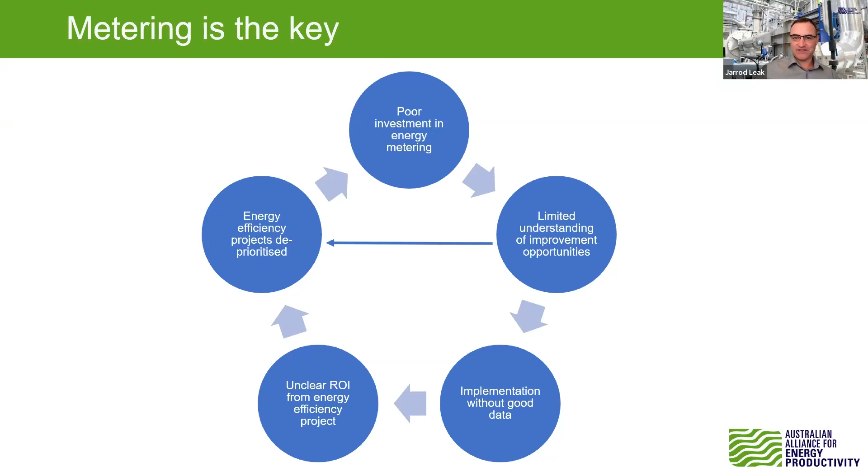So getting metering right really is the key to seeing these sort of projects go ahead. Once you've got that good data, you're sizing products and solutions correctly, and I think importantly, you're able to celebrate results and celebrate achievement and celebrate the investment there. And I think that is just so important here.

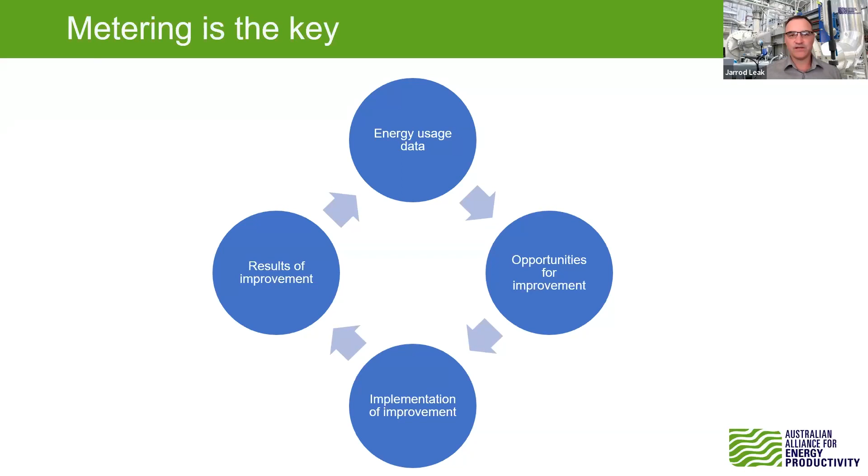And so that's why we're really encouraged by the likes of New South Wales government, and I just hear now that the Queensland government is also doing some sponsoring of metering programs to make sure that people do see the benefits of that, and really hope that kickstarts a wave of excellent metering across industry.

So to take us through a metering update and the state of play, we've got 4 great speakers for you today. Robert Hughes from the Office of Energy and Climate Change in New South Wales Government is going to kick us off and talk about funding. We've got Carlo Baghdadi from Schneider Electric to talk to us about metering. Gus from Endress+Hauser is going to take us through where some big energy users are on a process site and the metering solutions for those. And finally, Brad Parsons from Reliability is going to take us through a little bit on Internet of Things, Industry 4.0, and a little bit of how AI is now helping.

So to kick us off today, I'd like to welcome Robert Hughes. Robert has recently joined New South Wales OECC after 6 years at NABERS, where he's done plenty on the auditing programs, and plenty in the water and environmental engineering industry. So we're definitely in safe hands to take us through what the government's planning. Robert, I'll stop sharing and get you to start your presentation. Robert is also joined by Brian Yeo from OECC, who'll be here to help with any questions that may come up. But Robert, over to you to take us through this fantastic program that you guys are just about ready to launch.

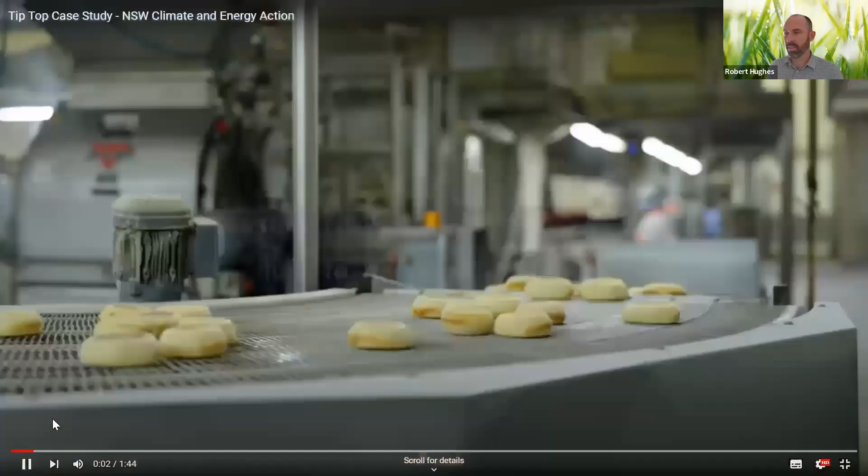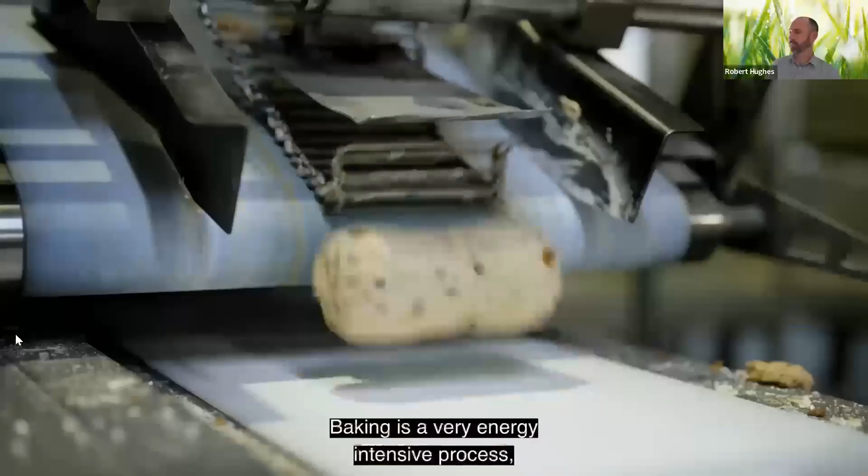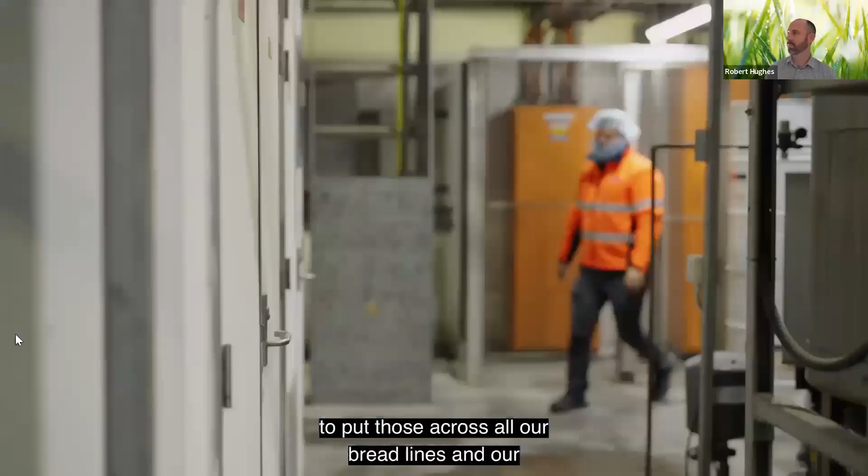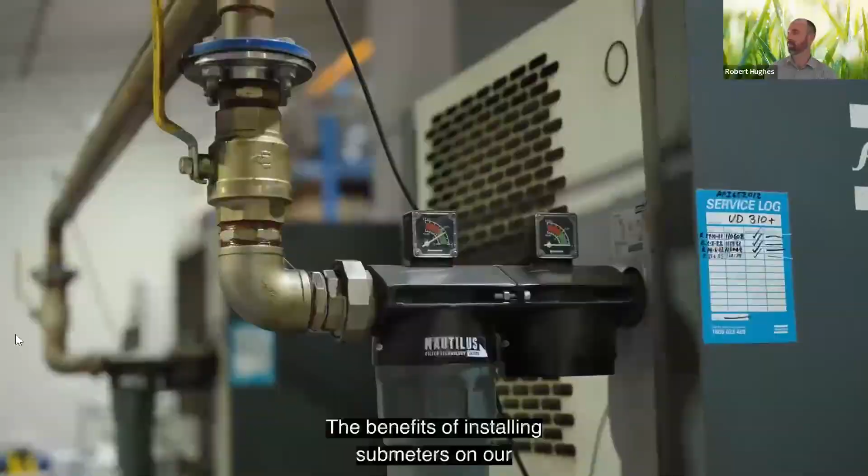Baking is a very energy intensive process, and our mixing alone takes up a very large portion of our energy costs. In 2021, we received a grant from the New South Wales Government to install electricity submeters, and we managed to put those across all our bread lines and our production facilities, which has been able to really give us much more insight into our power use and give us a breakdown of how much we're using in our factory. The benefits of installing submeters on our site was immediate. We were able to drill down into our two identical bread lines and find that they had some very slight differences in energy consumption, and we were able to go and attack those and fix those.

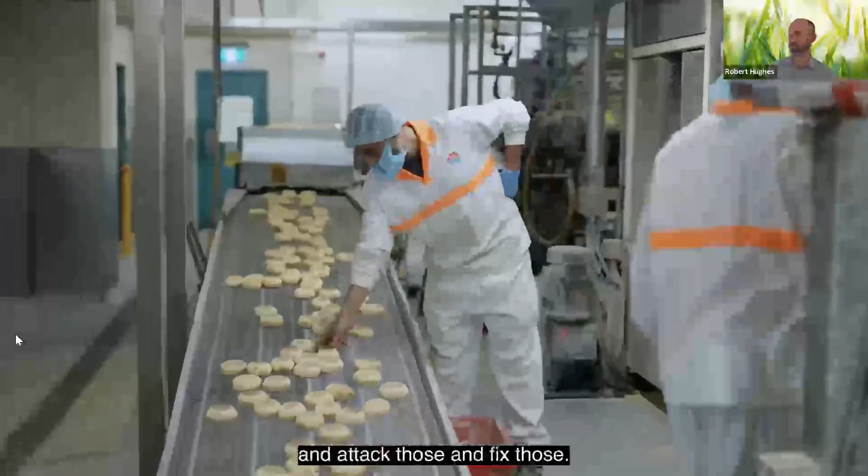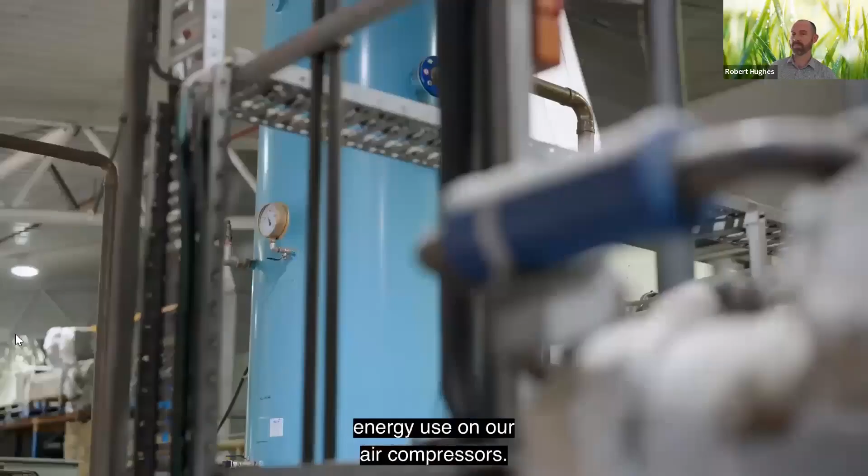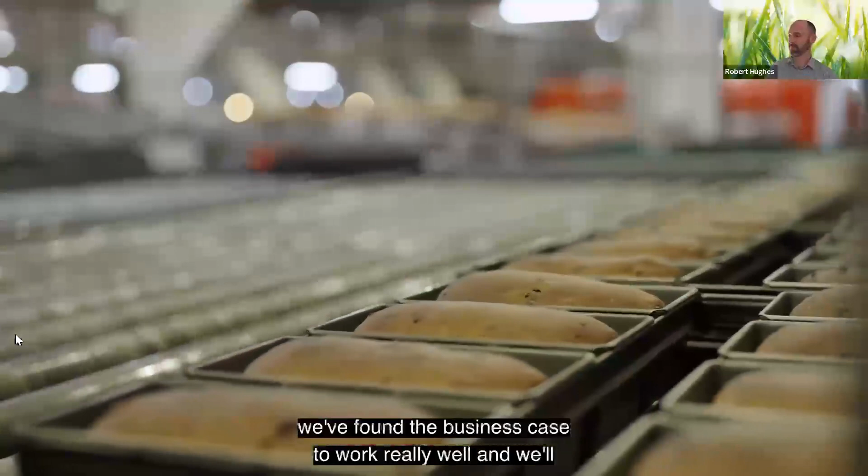Probably the biggest thing we found is our air compressors on site consumed a much larger proportion of our electricity use than we were expecting. We've installed an air optimizer on site, which has been able to knock about 8 to 10% off our energy use on our air compressors. Installing submeters on site has really helped us achieve and work towards our 2025 environmental targets, which include reducing greenhouse gases by 30%. Since we've installed the submeters on site here, we found the business case to work really well, and we'll be looking at rolling those out across our other 14 bakeries across Australia and New Zealand. Acting on environmental challenges here at Tip Top is really key to what we're doing. So anything we can do to reduce our footprint and move to sustainable energy is really great for us and for everyone.

Okay, so this case study should be available via our website shortly, and we hope for many more success stories like this through our metering package.

So the $12 million metering package that I'll discuss today is delivered by the Office of Energy and Climate Change. The package supports businesses to get the most out of energy metering and monitoring, and the package includes several initiatives, including round one of sub-metering grants, which is now closed, the metering and monitoring planning program, which is open currently, round one of metering plan implementation grants, which are expected to open this year, and an energy performance services initiative expected to open next year. So I'll focus on the specifics of the projects that are of immediate current interest, which are the metering and monitoring planning program and the metering plan implementation grants.

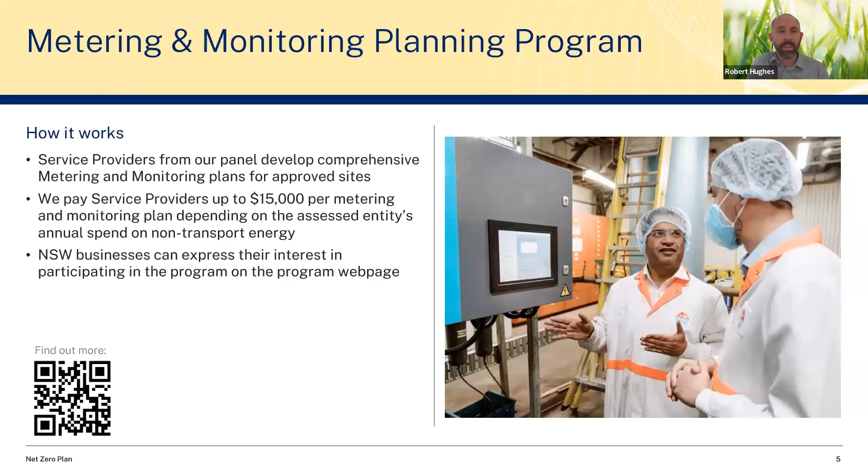Our metering and monitoring planning program is currently open, so I'd encourage you to take a look at our website. And this is how it works, essentially. Service providers from our panel will develop comprehensive metering and monitoring plans for the approved sites, and we'll pay those service providers up to $15,000 per metering and monitoring plan, depending on the assessed entity's annual spend on non-transport energy. So New South Wales businesses can currently express their interest in participating by going through the program webpage.

Some key eligibility criteria are listed here, but please make sure to go to our website for full information. Some of these criteria include there must be a business in a manufacturing sector or another industrial or commercial sector. They should have a complex energy system in terms of the number of processes, distribution systems, energy types, or end uses involved. There should be a site or facility located in New South Wales and spend more than $200,000 on energy annually per site, including all purchased fuels, aside from fuel for transport. And they should have a clear and justifiable objective for developing a metering and monitoring plan. And if the site is a commercial building, then it's the base building that is being considered for eligibility.

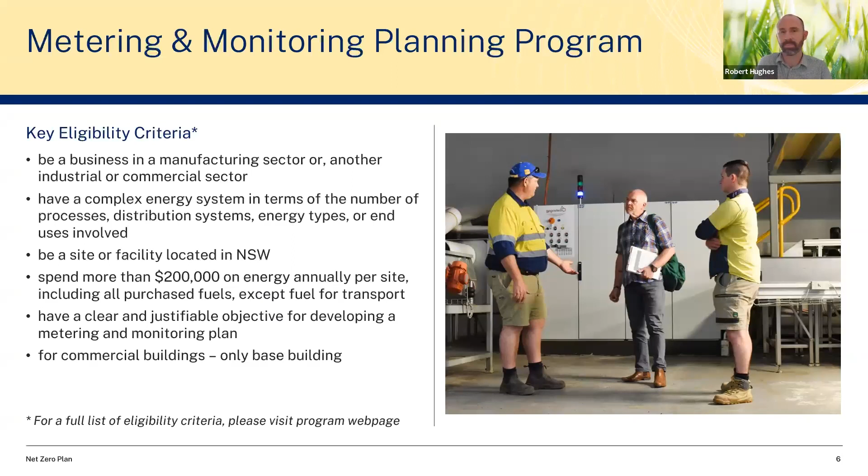So we are also expecting to launch a grants program for the implementation of metering and monitoring plans. Now, more information will be available following the launch, which is expected this year. But we can advise we may fund up to 50% of costs for eligible projects. So watch this space. The best way to keep in contact is to add your expression of interest via our website.

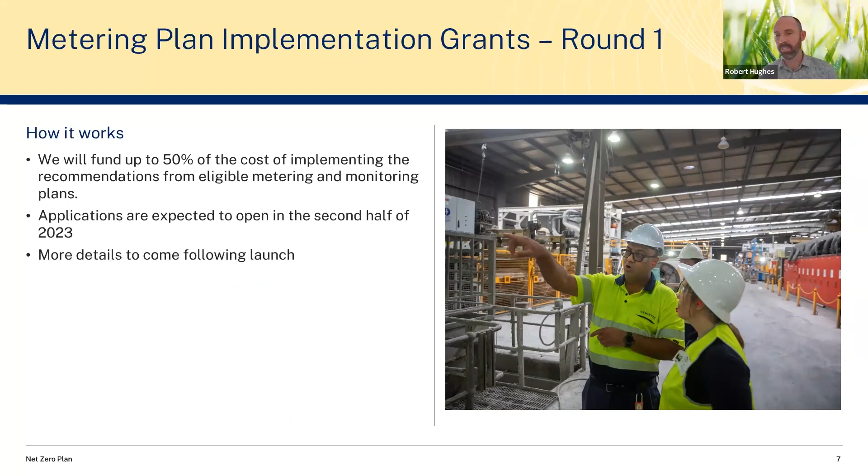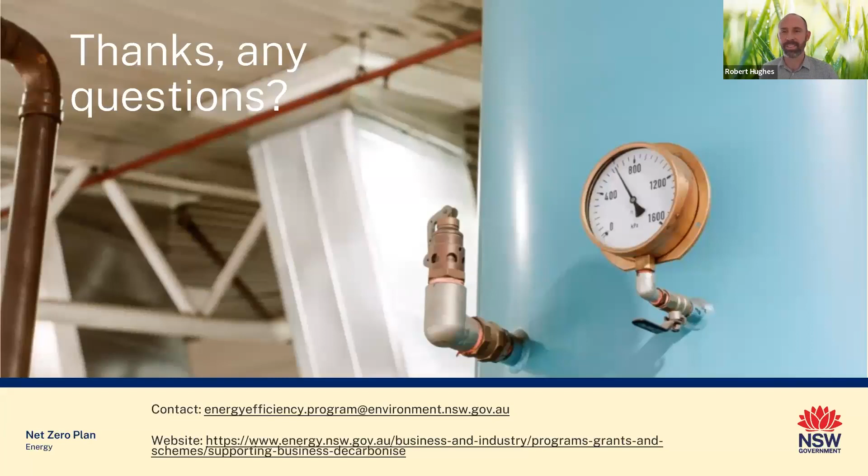And round one, when you were helping with this implementation, I recall there were $25,000 co-funding grants, if I'm not mistaken. For the implementation, when you did that last year, that was $25,000 per site, I believe. I'll jump into that question. We give, I think, up to 20,000 for that, not 25, and that one was sub-metering grants. Sub-metering. Yep. And so you're hoping to make it something similar to that then as well.

So it's metering as well as this. So this would cover instrumentation and things like that as well. Yep. But for this grants round, we are targeting larger energy users compared to the sub-metering grants. Yep. Gotcha. That's the difference. Yeah. Thank you. And that was excluding transport fuels as well. That's right. Yep, the criteria is almost similar. It's just the target audience is different.

Okay, great. Not too many Q&A coming on that one. Maybe Robert, it's just straightforward, and it's like, great, there's going to be submissions coming. But if I understand, it was $12 million. It was the 12 million. Was that covering the $15,000 for the planning and the 20,000 for the implementation? So that's for both those. Yeah, I think that that's all from the $12 million pool. Great. So hopefully you'll be helping a good few hundred sites in New South Wales. As many as we can, hopefully.

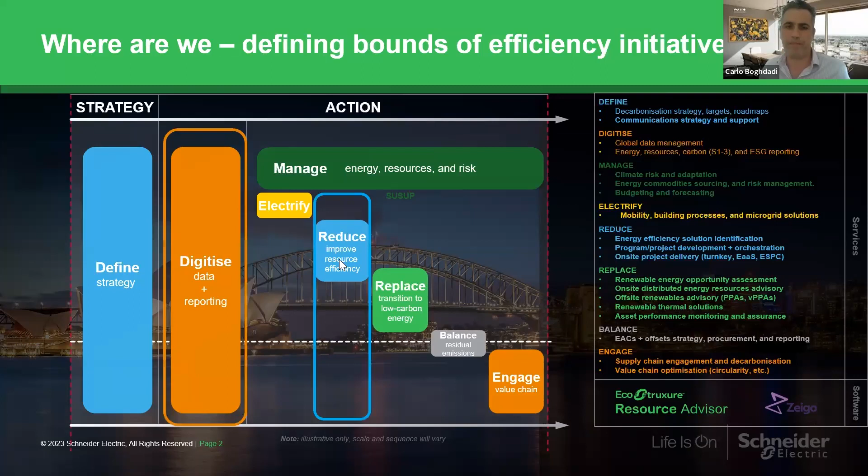An MMP is the first step towards implementing an energy management system and can help achieve many objectives, including increased energy efficiency. Energy savings can be 15% or more from an EMS, and with the cost of energy on the rise, efficiency is even more important now than ever.

MMPs can lead to optimised resource allocation because as we have accurate data on resource usage and efficiency, we can allocate resources more effectively, leading to cost savings and improved productivity.

Furthermore, metering can enable data-driven decision-making. No longer are decisions made on gut feelings. These days, we need real-time data to understand what's happening, why it's happening, and what we should do about it. Also, they provide us with a mechanism to evaluate performance, whether it's a manufacturing process or trialling a software application. Understanding how well something is performing is crucial for continuous improvement.

They can help us identify and mitigate risks by monitoring various aspects of a project or operation. We can spot potential issues before they become significant problems, saving both time and resources. They also help to ensure that we meet regulatory requirements and maintain accountability in our operations. So now that we understand why metering and monitoring plans are essential, let's delve into what they entail.

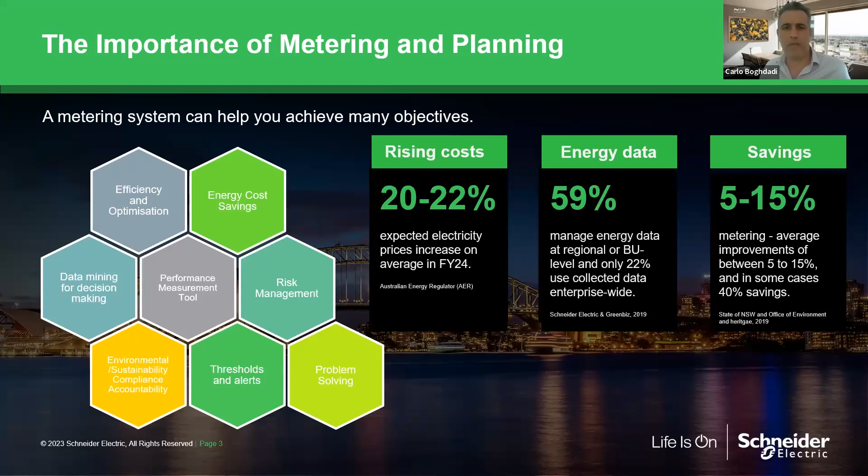An MMP report is created from on-site investigations by engineers and metering experts working in collaboration with the customer, who are often also site engineers. The report serves as an investment decision grade tool to assist companies in making decisions on an EMS, or energy management system. So in an MMP report, you would typically see the following sections.

It will start by defining clear objectives: what are you trying to achieve with your monitoring efforts, and specifically what data you need to collect and why? It will include analysis of all the energy sources, using the available data on hand to understand overall usage on an hourly, daily, monthly and yearly basis.

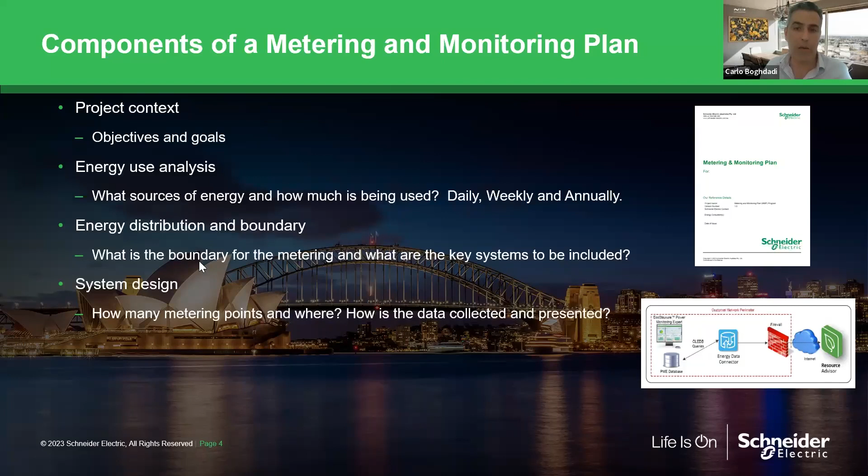Next, an energy distribution boundary, where you define what energy sources and systems services you will monitor. It will include a system design encompassing everything from how many metering points, what kind of meter, what CT, whether there are any existing meters or systems to integrate, what communication devices are required, and how data is collected, and so on.

It will include the installation costs: cost for meters, cost for installation, integration, and cost for communications and cloud services. And finally, next steps, including how to go to market, details for any recommended energy performance or bureau services, recommendations for an energy manager or energy team, and which stakeholders to involve with this project.

Now let's explore how to implement metering and monitoring plans effectively. Step one is to select your partner to assist with developing your MMP report. Companies like Schneider Electric and our EcoXperts are here to assist with this, and to assist with developing strategies, goals, and identifying potential government grants, which you've already heard about.

During step two, your partner will complete the MMP, including designing a metering solution, identifying critical metering points, deciding on appropriate data collection models, presenting the right tools and technologies for data collection, and all the analysis required for the MMP report. This also includes developing and refining a business case for the metering system.

So now you're at the implementation stage, where you will finalise the solution and develop fixed costs to procure metering, complete installation, commissioning, and integration. Post-implementation, with the metering system now installed, it would be time to initiate your active energy management plan.

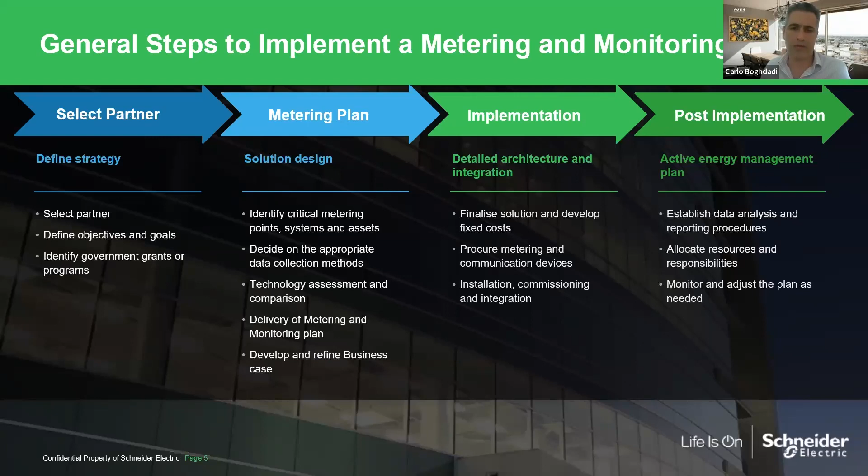Your partner needs to be abreast of the latest in technology and innovation. That's a no-brainer. Of critical importance, they need to be up to date with data security and privacy to protect sensitive information and comply with privacy regulations. Reliability is of great importance, working with a partner who stands by their products and services and will be around in the future. The ease and ability to integrate to existing systems you might have on site is also vital. Also of equal importance, customization and scalability to meet your custom needs. It is also imperative that all compliance and regulations are considered. And for the long term, maintenance and warranty is of critical importance.

Oh, sorry. Computer froze up there for a second.

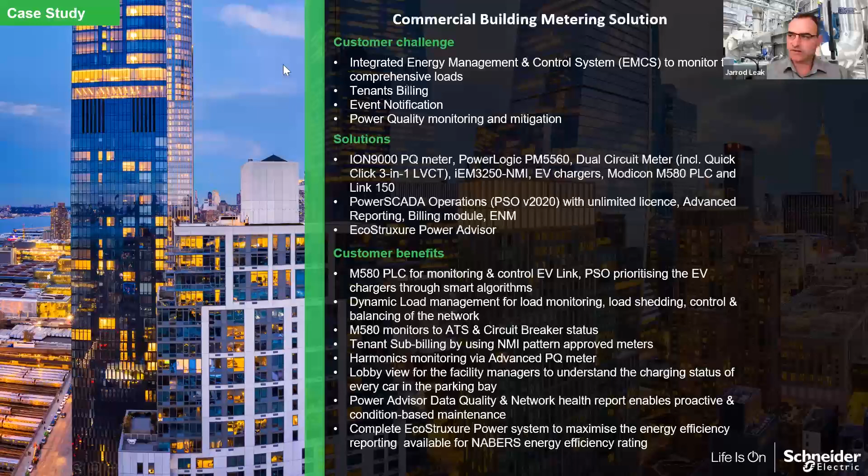Thank you. You'll see those grants coming, looking at $15,000 for that planning. I've heard of sites spending $100,000 or more on their metering planning. Is $15,000 more going to be for the smaller sites if they want it fully funded? Some will just use the $15,000 to reduce the cost of a larger study.

But is that really just going to be for smaller sites, or do you think you can get a reasonable site done for that $15,000? I think, Jarrod, it all comes down to the size of the site. $15,000 will probably cover your average commercial building or industrial site. If you're talking multiple sites, potentially across multiple states, or in this case we're talking New South Wales, or multiple locations within New South Wales for instance, you might expect to pay a little bit more.

But there is a lot of time spent on site. Sometimes the engineers can be on site for two or more days to collect all the data, to have all the discussions with the client, to understand what existing systems there are, to make sure you integrate with any existing systems, because most sites you go to will have some form of metering. They may not be making the most of it. So hopefully that answers the question.

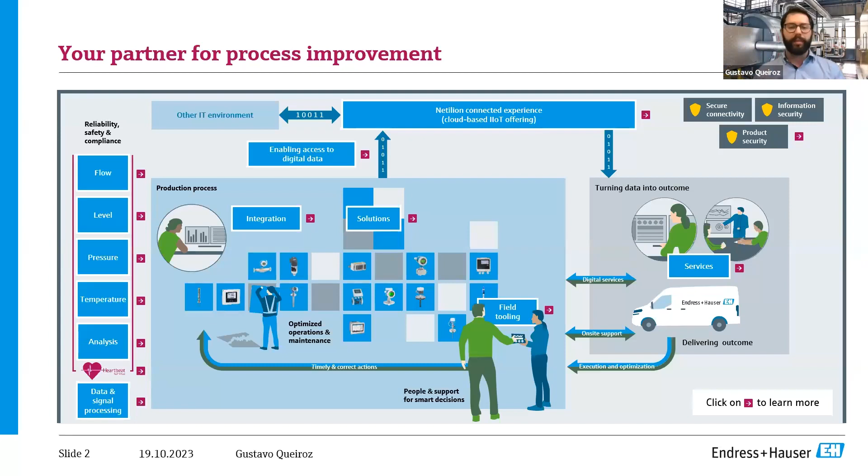Again, it's a huge topic. I'm going to use one simple example that works pretty well, because from the case study we noticed there were some savings around compressed air. But I want to kick things off with a couple of facts and challenges we have whenever we have compressed air systems.

First of all, compressed air generation is an inefficient process. Every time you're compressing any kind of gas, you have some heat as waste, so you're not actually converting all the energy you're supplying to your compressor. One of the challenges we have is we're often just measuring how much energy we're supplying to the compressor, not actually measuring how much air is being generated or distributed across our network. That's point number one.

Point number two is around the pressure in our compressed air system. There are two different ways we can look at pressure. We can look at it as the definition we learned in school: pressure is force divided by area, which gives us a grip on what it is. But a different way to look at pressure is as an energy density variable, which gives us a little bit of an idea of how pressure relates to the efficiency of your compressed air system.

So if you have pressure losses across your distribution network, it means you're putting a lot of energy into your system but not converting all of that energy into usable work. There are different factors that can affect the pressure loss in your network.

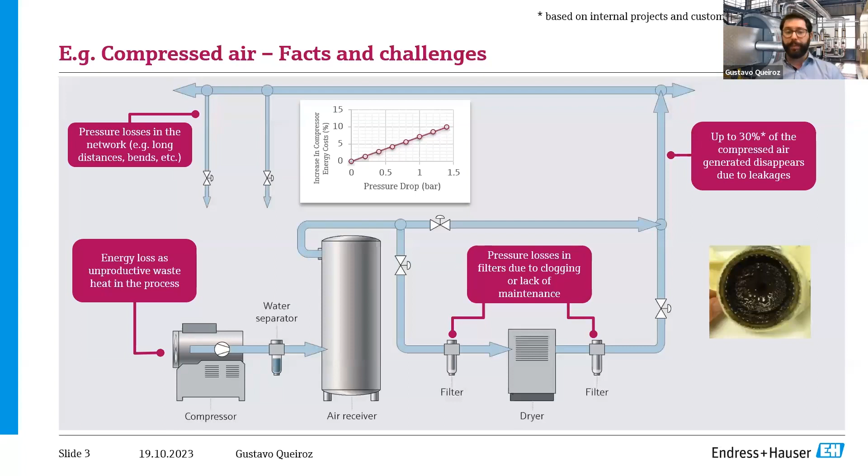The third topic is based on some feedback we got from customers. We often see a huge amount of compressed air being lost due to leakage. One of the challenges we have is we're often just seeing the power consumption of the generator, but not seeing how much we're actually losing. That's one of the things we're trying to address, and we are addressing it with process instrumentation.

So I'm going to give you a quick overview on how you can use instruments and sensors to give you more insight about the efficiency of your compressed air system in this case, but also to understand a little more how we can start saving and identify the losses.

First one is the real-time calculation of your compressed air efficiency. In this case, we're not just interested in the power the compressor is actually consuming, we're integrating the power consumption with the amount of air that is actually being generated. This gives us really good visibility about the efficiency of my compressed air system.

It also gives me some insights to make decisions. For example, do I have to split? Do I need an additional compressed air unit, maybe a second one with a different power? Should I split this compressed air system? So just to give you an idea on how this can actually work.

Second one, mass balance about different areas. This gives you the visibility to identify areas where you have anomalies in terms of consumption and set the benchmark for you to start working in terms of reduction.

As I mentioned, we're talking about pressure. Pressure sensors are extremely accessible today, and that's something you can easily use to monitor specific components around the distribution network, but also to run some continuous testing.

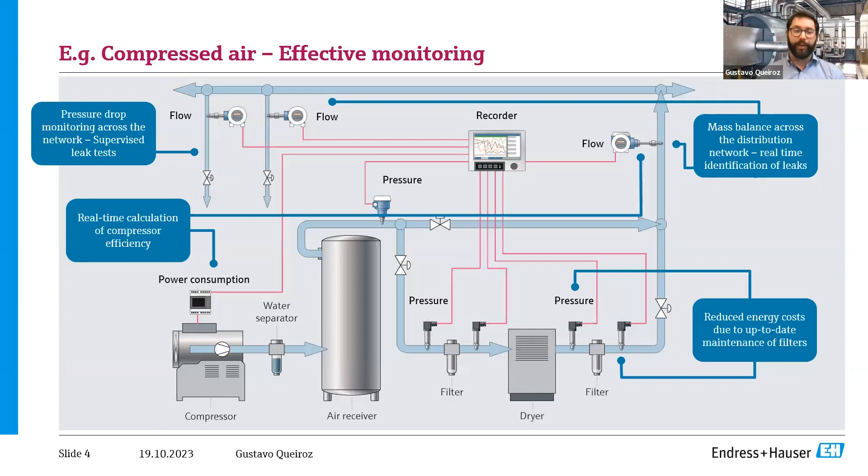Again, it's such a huge topic. I'm just throwing out a couple of ideas on things we can actually do in terms of compressed air, which is a really common topic. But we can bring the same methodology and the same idea to different areas, so we can talk about heating systems, cooling systems, steam production and distribution.

And one of the cool things about these systems is we're not just talking about mass balance, but we're also talking about energy balance. And I think there's a really good motivation behind trying to understand what your energy balance is, to make sure that you're actually distributing energy efficiently across your site.

So if you want to know more, we're going to share some more information later in a follow-up email, but we're more than happy to share how we can support you with that. I think that's me, Jarrod.

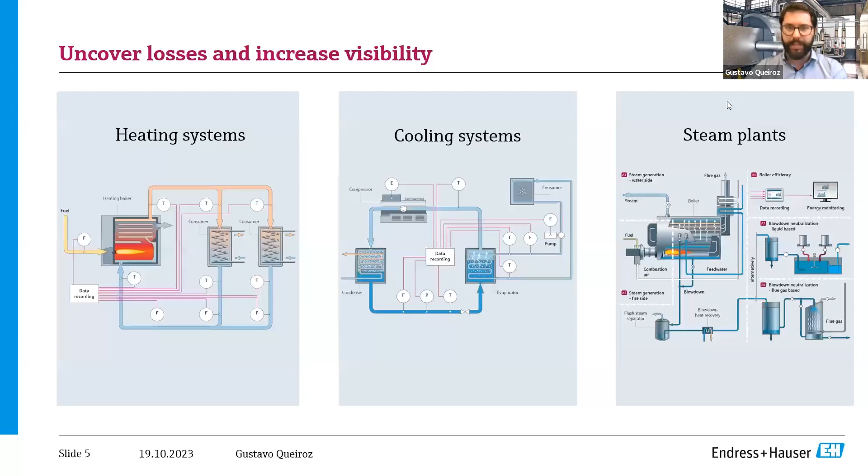We have a question on AI from Carlo's presentation, we'll take that at the end. But Gus, thank you so much for that. You've just about hit on one of our favorites.

If you want to show real energy savings, I know LEDs are easy to do, great, LEDs feel good, great. But if you want to show the real energy savings and make a real difference, compressed air is a great place to start. So with that, it sounds like, Gus, you'll be able to find those leaks, makes it much easier to track how that leakage thing is going. And rather than it being a solution of supplier A always recommending just make a bigger compressor, this is really going to help you out to make sure you don't have to get that larger compressor every time as well.

Yeah, that's correct, very good, very good. Thank you for that, Gus. That's great, we'll come back and see if there's any questions come through, and we'll have you here to field those.

Moving on now, we are going to start talking about some innovation and AI. Joined here today by Brad Parsons, the founder and CEO of Reliability. Brad's got a history in software as a service and all about industrial innovation. And Brad, what I liked about when I read about your profile is you're not just about technology.

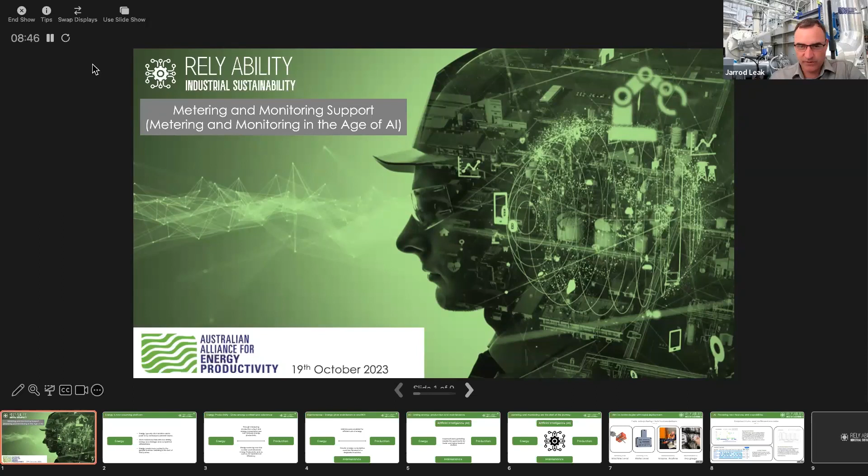It's not too bad, but if you do the swap displays, hopefully that will display. Yep, we're in business. That's perfect.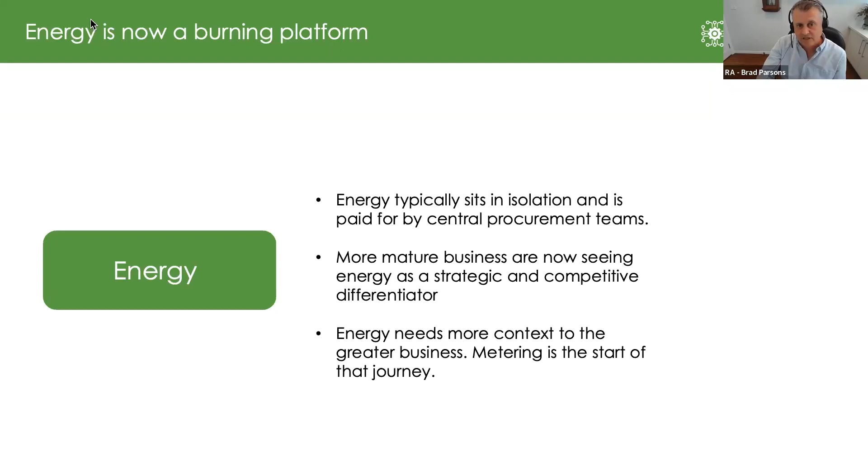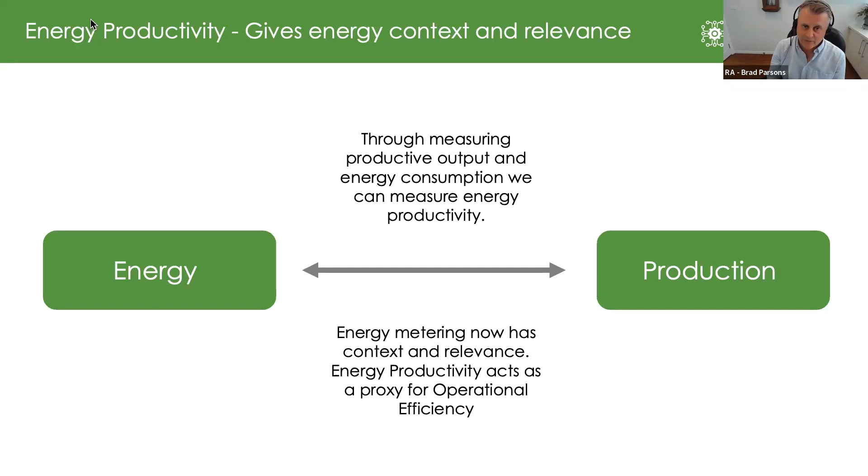As Jared's business is called, it's about energy productivity. When you start to align energy and productivity, you can really get to understand the efficiency of your business. Trying to map at the machine level how many kilograms per kilowatt is a really important metric, and metering can start you down that path. What that opens up is other angles to understand the relevance of that machine in your environment. Really, it's a proxy for operational efficiency, given the cost of energy inputs these days - it's even more indicative of how well your business is performing. So I encourage people to look at that.

So all of that maintenance activity really allows you to use energy to measure the efficiency of your maintenance activity. Traditionally, decades ago, a maintenance technician would measure the energy, then do the maintenance, then measure the energy again. Somehow we've lost that - it's not typical in an environment now. So getting the energy and maintenance data aligned really gives you a great opportunity to look at the efficiency of your business in different functions. We see energy as a sort of economic indicator of how well maintenance has actually been done.

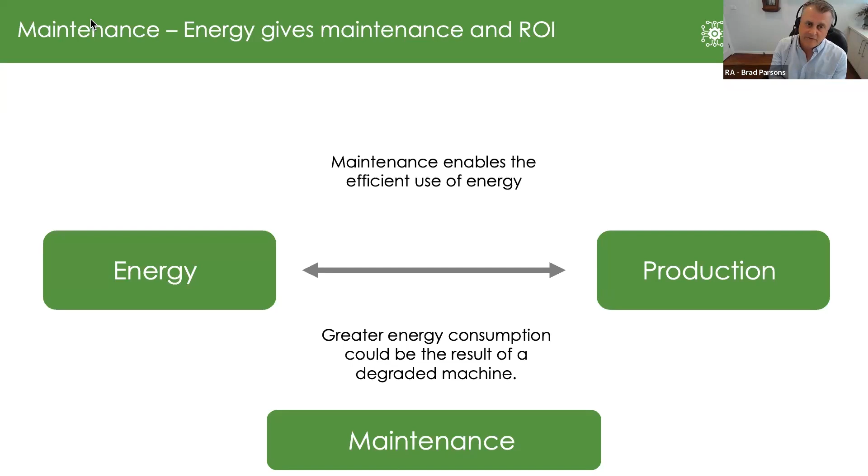And the final thing is, when you're collecting all these pieces of data, often you're getting so much frequency of data, so much volume of data. Trying to do that analysis with humans using traditional tools like spreadsheets - I know we all run on Excel - but now the opportunity is to feed that data into an AI-based system, and there are a number across the globe that we can recommend.

What these systems are doing is instantly taking an alignment of all this data. They're giving it contextualization, and they're using, you know, you all use ChatGPT and have had a go at ChatGPT - we're now working with partners out of Europe that are actually using that in the industrial context. So they're feeding their maintenance systems, their energy systems, their production systems into a single graph that you can ask the question: what happens to my energy costs if I lift production by 10%? What are the pumps most likely to fail when I lift my production by 10%?

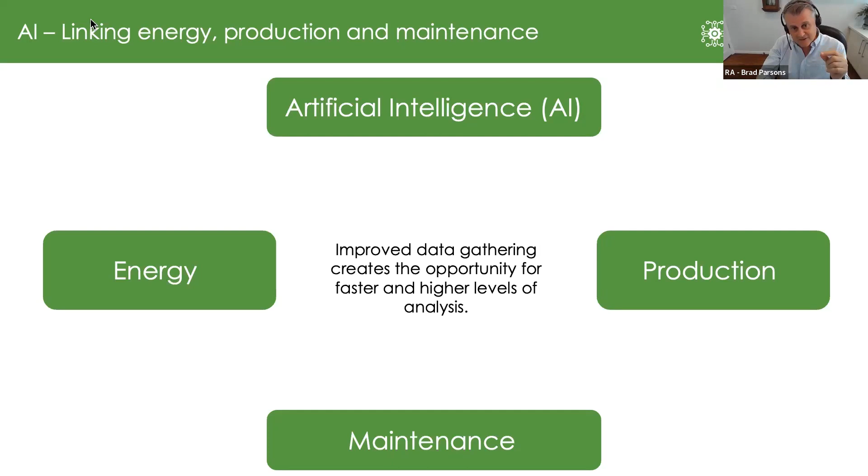So through the aggregation of all these different data sources, where metering sort of starts that journey, it's a big opportunity. Effectively, what we're seeing is digitization really starts at metering.

It gives you the opportunity to instrument down at the machine level. Typically, we're monitoring at maybe the circuit level or plant level. We're encouraging people to go down to the machine level. And I wanted to show you some technologies, because traditionally, it's been quite hard to get down to that level without some serious investment.

I'm going to show you a couple of technologies where this can be quickly and easily done. The first one I'll show you is a product called FitPower by MOVUS, and this is literally a strap-on sensor which picks up on single phase or three phase, which is traditionally hard to do. Obviously, the current cancels each signal out. Normally, you'd split it out into CTs on all of them, and you'd need an electrician to do that. You need to shut down the circuit, and it's been hard work.

But with this, as you can see on the screen, anyone in a plant can install this in minutes. Even I can install it, which says a lot, right? And I'm going to show you the other one by a company called SNAPI. Again, a local Queensland-based business. They've got a little AI-enabled camera on the back, and you see the gauges there on the screen. Again, this is installed in minutes. It's mobile enabled, so you're up and running in no time.

So doing a metering project doesn't have to be a very long and extensive process. Planning can be cut. If you can get that initial data, you can really screen that out and really target the areas that need improvement for systems and processes like we've seen today. This could be your first tranche at really trying to understand what your planning looks like.

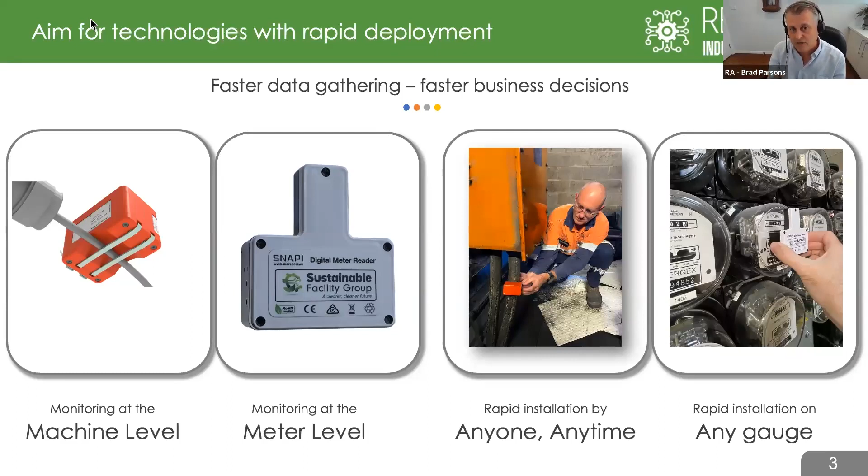But what is this AI that we're sort of talking about? I thought I'd just give a couple of examples here. What systems like this will do is enable you to pick up at the machine level different machine states, different running states. I've got a cooking oven here. We saw that baking is very expensive on energy, but same for deep fryers, or other types of ovens.

And we can see, I don't know if you can see it clearly, but you can see these different cycles, and I'll just call it out. We've got an unknown state at the top. We've got some cooking cycles, deep cleaning, preheat, fast clean, standby. Understanding that level of operational states on your machine and the different levels of energy intensity that each of those brings. I'll give an example.

Let's say in a supermarket, if the defrost that normally runs from, say, 2 to 3 in the morning is still running at 8 o'clock in the morning, then you've got an issue. You might have all the refrigerated food that's gone stale or shouldn't be sold from that point on. What you can then do with this type of technology is do an alarm on that state. Why hasn't it moved out of that cycle? Why hasn't it moved into the freezing cycle?

So obviously we can also start to pick up running profiles. And if you've got particular pumps, I think the worst we've seen in a company in the US was a pump turning off and on 300 times a day. That's an enormous wear and tear on the machine. Obviously maintenance is a nightmare after that, and you're probably replacing that in months anyway. So with this type of technology, if you can chase the power cable and connect it on, you're up and running.

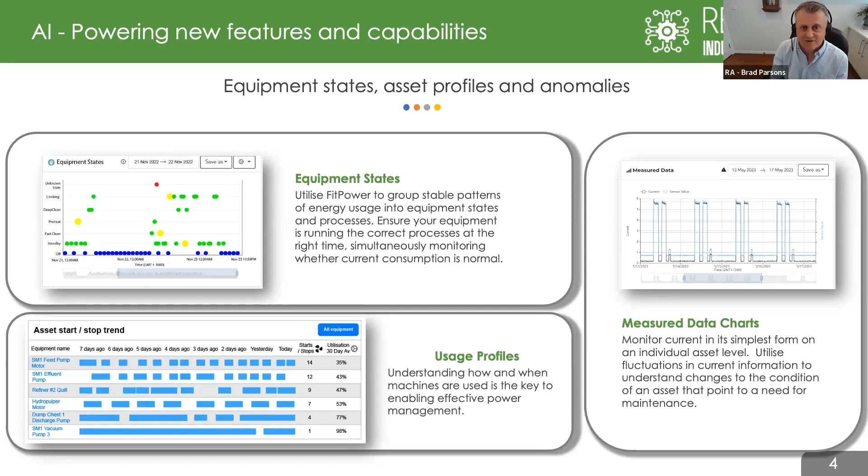Brad, thanks for that. Great to see what's coming there. Have your systems been used for process control? Obviously we're hearing about how it's used for maintenance, and great that you're closing that loop, that when people do maintenance, you can actually get a pat on the back and say this was well done. But what about for actual overall process efficiency? Anything else that it's being used for?

Absolutely. This is kind of creating a feedback loop. Do we have anomalous energy usage in a particular phase or a particular part of the process? Once you can start to link different machines together, and like I said, you can do this really quickly, you can instrument the process up in the morning. Anyone can do that. Then you can get a reading on where you're likely to get issues within your process. That might give you an indicator that you need a more formal and more structured energy program to be implemented. But getting that early indicator of where the issues are gives you a far faster start than traditionally we've seen in the market. Brilliant.

You did mention ChatGPT for industry. I haven't heard of that one yet, so I'll have to look into that one. The idea of asking it, if I increase my production, what's my energy going to look like? Because right now you'd do that via a digital twin. It's really powerful.